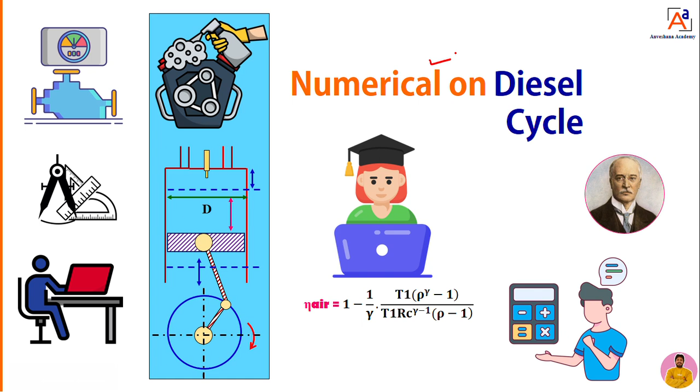Dear students, in the previous class, we solved one numerical on diesel cycle. Now I will move towards the next numerical on diesel cycle. Okay, so next numerical on diesel cycle. So now first, dear students, I will read the problem first, then I will solve this numerical with

detailed steps. The stroke and cylinder diameter of a compression ignition engine working on the theoretical diesel cycle are 250 mm and 150 mm respectively. The clearance volume is 0.0004 meter cube. The fuel injection at constant pressure takes place for 5% of the stroke. Calculate the efficiency of the engine.

Dear students, he has given one 4-stroke diesel engine and he has given some bore diameter and stroke length and he has given clearance volume also, and he is telling that there is a fuel injection at constant pressure for 5% of the stroke. If it's so, then calculate the efficiency of the engine. So how to calculate that? So we will solve the numerical step by step.

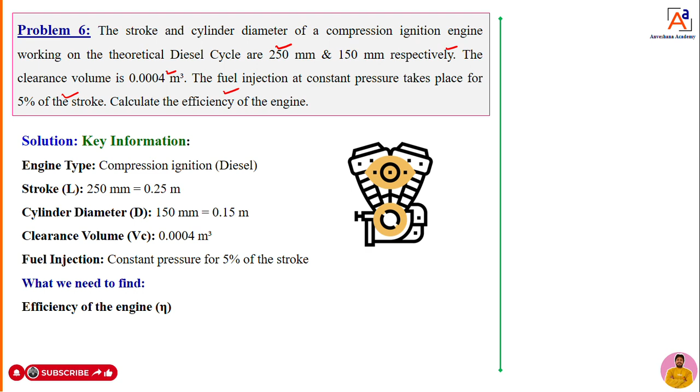We will try to understand the problem by having a schematic diagram. That schematic diagram you can see here, dear students. What all things he has given? So there is a diesel engine working on a 250 mm. What is the 250 mm? He is telling that first is stroke length, then second is cylinder diameter. Stroke length is 250 mm, then cylinder diameter is 150 mm.

So what is that now? You can see what is stroke length. The stroke length is the distance between TDC to BDC, that we can call as the stroke length, represented as capital L, that he has given here as 250 mm. Next he has given bore diameter or cylinder diameter is 150 mm. That D you can see now. But you have to convert that mm into meter while solving the numerical first.

Then first and second parameter is over. What is one more parameter? He is telling clearance volume. That is 0.0004 meter cube. Where can we get the clearance volume? The clearance volume is the volume between TDC to the cylinder head, represented as VC. So VC is equal to 0.0004 meter cube. And it is a diesel engine, so here it is a fuel injector. A compression ignition engine has a fuel injection system that you can see here, dear students. This is the schematic diagram to understand the problem very well.

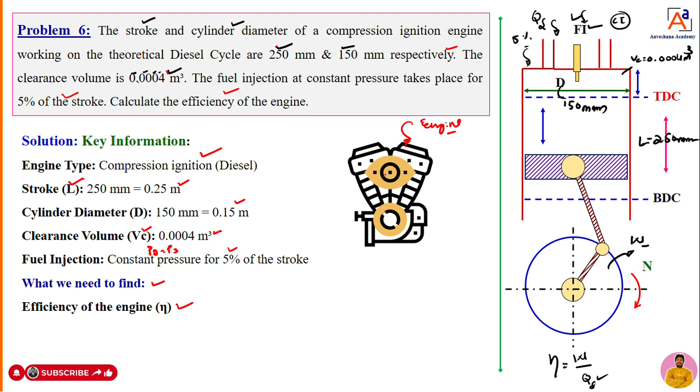Then he is asking to calculate or determine the efficiency of the engine. He has given an engine working at that particular condition, with those parameters. With the help of this given data, I need to calculate the efficiency of the engine. To calculate that, dear students, you have to understand the engine parameters first. For that purpose only I have given the diagram.

What are engine parameters? You need to identify the engine type, whether internal or external combustion engine. If it is an internal combustion engine, whether it is a petrol engine or diesel engine. Next, stroke length: the distance between TDC to BDC, that is L. Then cylinder diameter: the inside diameter of the cylinder.

And clearance volume, represented as VC. The volume between TDC and the cylinder head is the clearance volume. You should know these parameters, dear students, before solving the problem. Once you know all these data, you can calculate the total volume and displacement volume.

Total volume is what, dear students? Here we mark point 1, and this is point 2. Volume at point 1 is V1, and volume at point 2 is V2. That V2 I can call here VC. Then V1 is the volume between BDC and TDC, which I can call the swept volume.

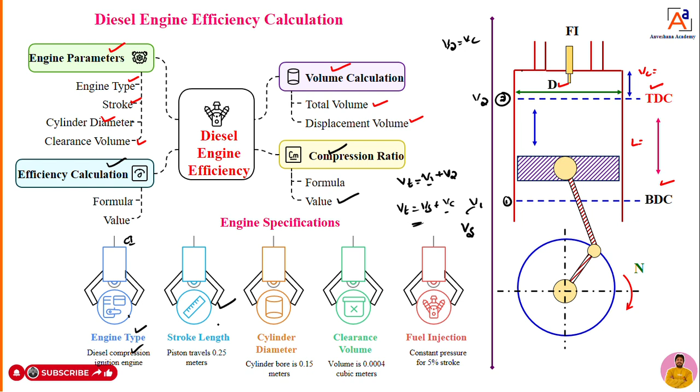Now once again, what type of engine do you have to identify? I identified the engine is a diesel compression ignition engine, a CI engine or diesel engine. Next, stroke length he has given 250 mm, converted into meter, 0.25 meter. Cylinder diameter he has given 150 mm, converted into 0.15 meter.

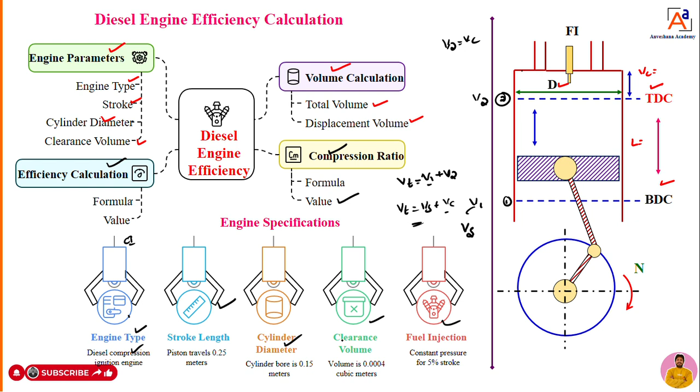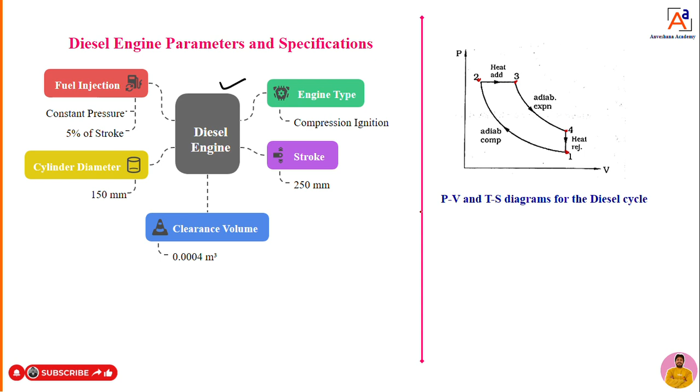Then he has given a clearance volume and fuel injection. With this data, I need to calculate the efficiency of the diesel cycle. To solve this numerical, you have to draw a PV diagram and TS diagram. I will draw the PV diagram here. P1, temperature, all the things he has given, you have to list out. So this given data I have written.

Okay, now the second step is to calculate the efficiency. There is only one determination, that is efficiency. To calculate that efficiency, we know the standard equation. We have already derived this equation, but in this equation, what are the main parameters? The main parameter is gamma. Gamma is constant for air, that is 1.4.

Then RC. What is RC here? RC, we know the formula V1 by V2, that we can calculate. But next, one more parameter is there, the cutoff ratio. Cutoff ratio is equal to what? V3 by V2. So to calculate this, I require all these values. Then what will I do now? First I will try to calculate the value of RC. RC is equal to V1 by V2.

What is V1, dear students? What I told, that is VC. Then V2 is equal to Vs. Here it is interchanged. Sorry, V1 is total volume. So one second, he has written it like this, but RC is equal to total volume divided by clearance volume.

What is total volume, dear students? RC is equal to our total volume, Vc plus Vs, divided by Vc. So here there is a small change, just you can correct it. RC is equal to total volume divided by clearance volume. Total volume is nothing but the summation of clearance volume plus swept volume. Vc plus Vs divided by Vc.

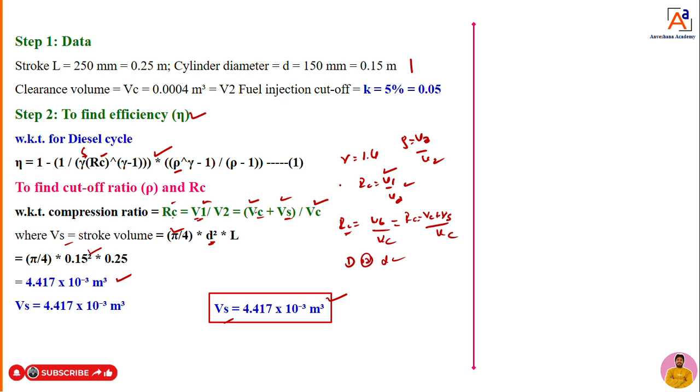What is that compression ratio? RC is equal to Vc plus Vs divided by Vc. The same thing I am doing here now. Do simplification. We are going to get the value of compression ratio as 12.04. Now to solve this numerical, one more unknown is there. RC is fine, but rho still needs to be calculated. To calculate that rho, we have one more equation.

Either we can calculate with the help of volume data, or I can calculate the cutoff ratio with an equation: rho is equal to 1 plus k into bracket RC minus 1. So what is this k? Heat addition at constant pressure up to 5% of stroke, that is k. 5% is 0.05. So rho is 1 plus 0.05 into RC, 12.04 that you already calculated, minus 1. Do simplification, rho is equal to 1.552.

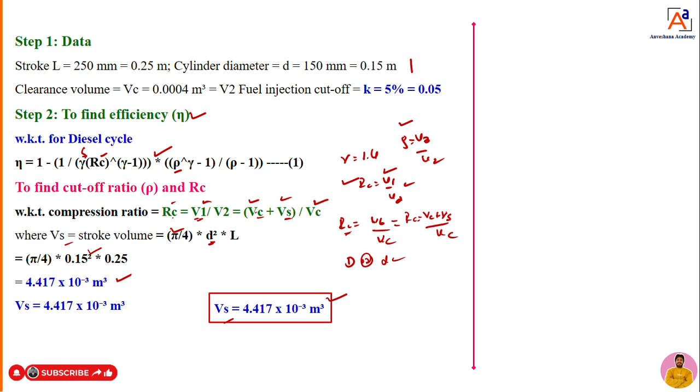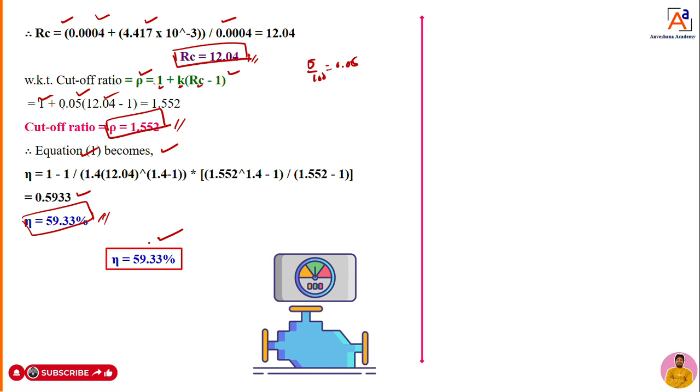Once you know the value of rho, you can go with the first equation. Now you know all the values. Substitute all the values in equation number 1. You are going to get the efficiency of the diesel cycle as eta is equal to 59.33%. This is my final answer, dear students. Hope you understood this problem. If you have any doubts, please comment and ask.